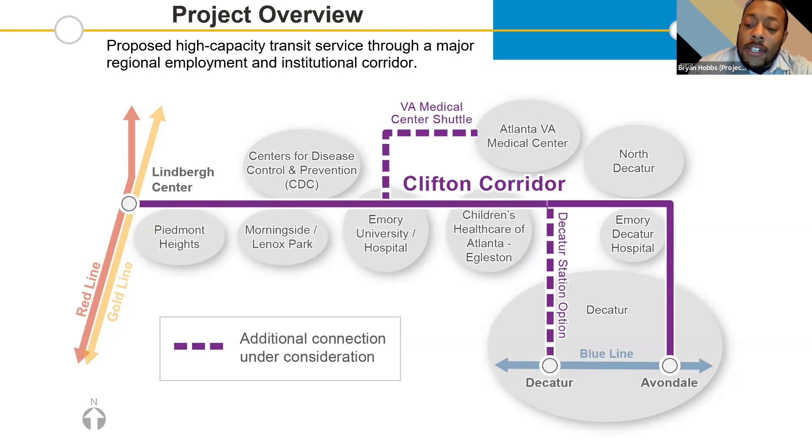If you may remember, we eliminated Decatur Station as a terminus station for this corridor, and now we go from Lindbergh to Avondale Station. What you see new on this map would be the dashed line, which is the additional connections under consideration. That would be our Decatur Station option, which is currently slated to be ART, and then a VA Medical Center shuttle, which at this point we are also considering. So again, that's just an overview, you've seen this before, and we'll go to the next slide.

So this current phase of work, again, we're still in alternative analysis, but we're getting to that point where we're really ready to recommend an alternative to the MARTA board. Our goal with this process is to select that recommended alternative for adoption by the board and then proceed into the environmental review process with the FTA.

Before we get into the analysis, I want to give everybody a refresher about the modes we've considered for this project. The first mode is ART, or arterial rapid transit. We also considered BRT, or bus rapid transit, and LRT, or light rail transit.

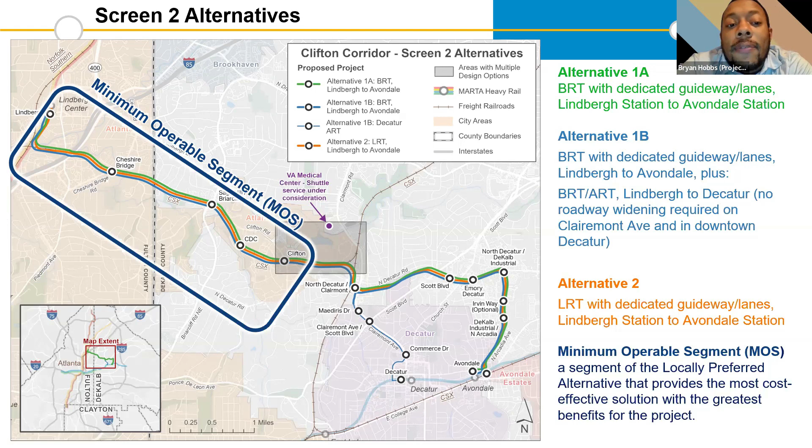I want to talk a little bit about the characteristics of each of the alternatives. So this is alternative 1A, as you can see. Again, this is BRT from end to end, from Lindbergh to Avondale Station.

Looking at the time frame, it's 31 minutes to travel from Lindbergh to Avondale Station, whereas typically in peak hours, Google says it takes 1 hour and 15 minutes by car to make that same trek. So all the way from Lindbergh to Avondale, 31 minutes with the BRT versus about 1 hour 15 minutes driving at peak time. That's a very big difference in time savings.

It's 97% dedicated right of way for the BRT in alternative 1A. When you look at the number of people within a half-mile radius of the stations, using 2020 numbers, you touch about 39,000 to 40,000 individuals. Same thing with jobs - using 2018 numbers, since that's before the pandemic - there are 34,400 jobs within a half-mile radius of the stations. So as you can see, it's a very busy, populated area around the stations.

Similarly, BRT with dedicated guideway from Lindbergh to Avondale is the same as alternative 1. The only difference here is that we are now considering an additional connection going down to Decatur. Right now it's ART, but it could be something different. From a time frame standpoint, it's still 31 minutes of travel time from Lindbergh to Avondale, but what you see differently is a 27-minute travel time from Lindbergh to Decatur station, even in mixed traffic. That shorter time is mainly due to the fact that it's a shorter route, since the BRT route is a little longer, so you're anticipated to get to Decatur station a little faster than Avondale station.

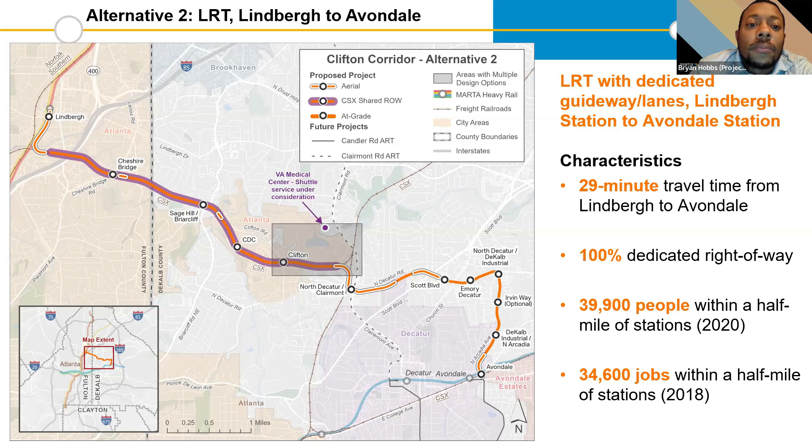So one thing I do want to touch upon before we move on into comparing the modes and comparing the alignment: the Federal Transit Administration's New Starts or CIG program, the Capital Investment Grant Program, which includes new starts and small starts.

In comparing these two alternatives and deciding which one should move forward, they're pretty similar, as I talked about before, in a lot of characteristics. But what really stood out was mobility improvements as well as cost effectiveness. Those two things really separate the alternatives, as you'll see in a few minutes. That helped us understand which of these alternatives needed to move forward based on which projects had the greatest potential to receive federal funding.

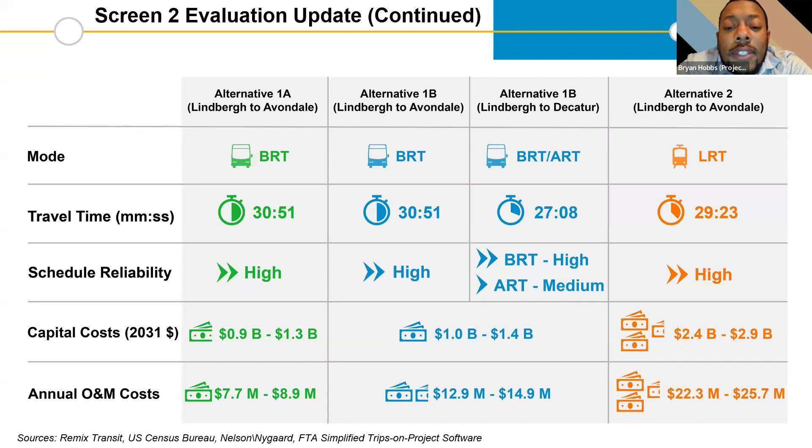The same can be said for annual O&M costs. For Alternative 1A, we're looking at about $7.7 to $8.9 million in annual operating costs, $12.9 to $14.9 million for Alternative 1B, and $22.3 million to $25.7 million for Alternative 2. So again, when you look at the difference between these alignments and modes, it really stands out when you talk about cost.

Travel time, reliability—similar. So what's really different about these modes right now is the cost. LRT is 2.5 times higher than our alternative 1A or alternative 1B at this point.

So that brings us to the similarities and what's different. When you think about BRT and LRT similarities, the share of dedicated right-of-way is similar. We talked about 97% for BRT in the end, and 100% dedicated end-to-end for LRT. So not much difference there.

Travel times and schedule reliability, very similar. We saw 29 for LRT, 30 for BRT—about a 1 minute difference. So not much difference when you talk about times, travel reliability, and scheduling.

Projected ridership: what we're seeing initially are some comparable numbers. We are not releasing ridership yet because we're still working on the model with the FTA—it's a new model, and with anything new there are growing pains. We're working with the FTA to ensure the inputs and outputs are correct before we're comfortable putting in these numbers. So right now we're not ready to release ridership numbers, but when we come back, we'll be talking ridership again.

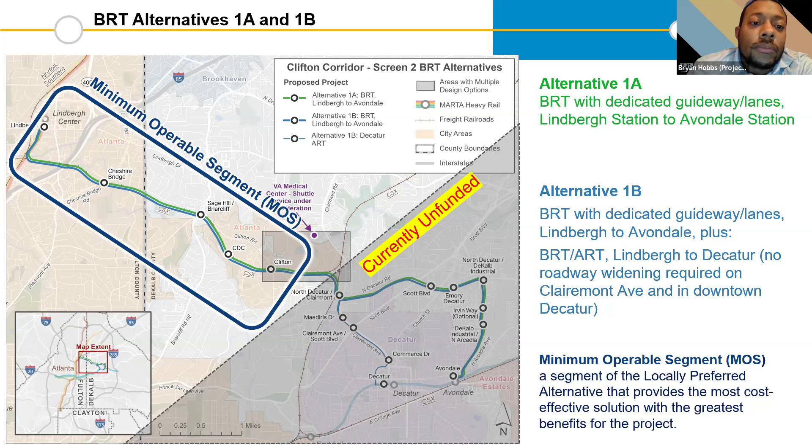So what does that leave for next steps for us? One thing we will do is hold a virtual-only meeting here in the next couple of months to present to you which of the alternatives we will move forward with. As you saw earlier, the difference is really the ART, or additional service going down to Decatur, if that continues to be viable. Once we come back to you all after that virtual meeting, we will give you 30 days to comment on that alignment. So please make sure you're on the lookout for that. We're looking, at some point, right now slated for May 2023, to go to the MARTA board for adoption. So that is what we're looking at at this point.

Just so you know, we do have one more meeting. This is more of an open house style meeting that will be at the North Decatur Presbyterian Church on Medlock Road in Decatur. You can come there and ask questions. It won't be a formal presentation, but you can ask questions you may have, or for those who have not been to the in-person formal meeting or this meeting tonight, they can come and ask questions. So please tell them we will be out again Saturday from 10 a.m. to 2 p.m. to answer any questions. And with that, I'll turn it back over to Content.

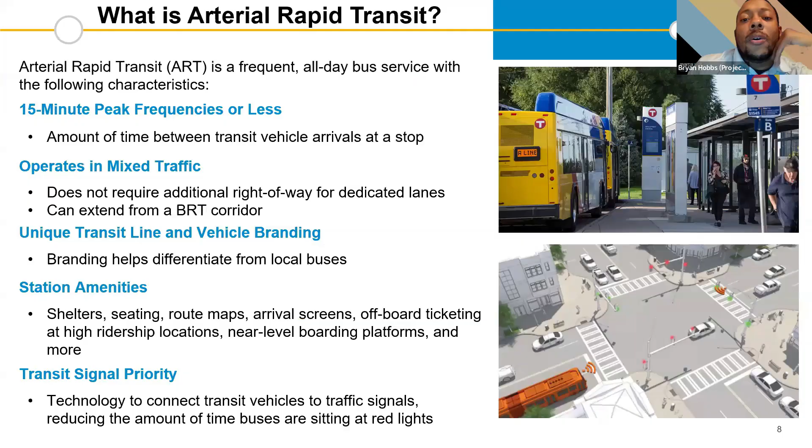Yeah, sure. We'll go back. We have a slide where we talked about what each mode actually entails. If you look here on this slide, ART and rapid transit, essentially the different characteristics, the guideway types—the difference really right now from a guideway type is you have dedicated right of way for light rail and bus rapid transit, so that's your BRT, LRT. ART is mixed traffic, typically in your current travel lanes. As you can see, some typical peak frequencies between the two: 10 minutes or better for bus rapid transit or light rail, because we wanted that to mimic rail. So light rail and bus rapid transit are similar. From the standpoint of ART, it's 15 minutes. That is still better than local bus service, so it is a much faster service. And as well as the capacity, when you start talking capacity, light rail as well as bus rapid transit holds more people—we can move more people per hour—where you're moving fewer people with the arterial rapid transit, but again, more than your local bus service, as well as the difference in the time frames.

Great, thank you for that answer. Okay, we have a question regarding the VA shuttle option. The question is, are there initial designs for where or how the VA shuttle will connect to the BRT?

Yeah, so we've had some initial conversations. We're working with, obviously, we have to work with Emory on that because it does go through the heart of their campus. So we've had conversations with Emory. There are a few options, it's not finalized at all. So we do have some ideas working together with Emory about how that looks, and then we'll start talking to the VA as well about how that connection looks to them. So right now there are a few options, we just will not narrow those things down until the next phase here.

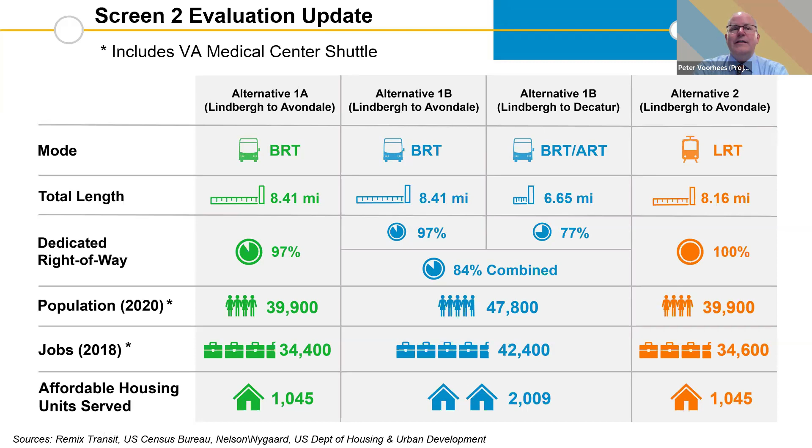In the eastern part of the corridor, where you would leave the railroad right-of-way and enter street right-of-way, conversations need to be ongoing for how to create those dedicated lanes. The expectation is probably that the path forward is to maintain existing travel lanes and still find a way to provide dedicated transit lanes. There are places where it seems there would not be a significant impact on traffic to convert a travel lane to a dedicated transit lane, but there are other places where that would be a real challenge. So ongoing conversations for how to make that happen.

I guess the other thing I would add is, alternative 1B that we're showing here right now, where a BRT vehicle would potentially travel in the CSX corridor and then transition at North Decatur Clairmont to Clairmont Avenue to approach Decatur in shared lanes.

The path there in shared lanes is very similar to bus operations today. So, not an anticipated impact on traffic there, but ongoing conversations for how to provide those dedicated lanes in the eastern part of the BRT segment.

Thanks, Peter. Since we have you, can you explain how the buses will maneuver through traffic and their dedicated lanes to pick up passengers? And Bryan, you could address this one just as well, I'm sure.

No, a BRT vehicle doesn't need to leave its dedicated lane to pick up passengers. There would be new stations located in the roadway, potentially in the center, an island station with good walk access. The BRT vehicle would just pull right up to that station, open all its doors, and let people on and off through every door. You pay before you board. You wouldn't have to leave that lane and navigate through shared traffic to get to a curbside stop. You would stay in that dedicated lane.

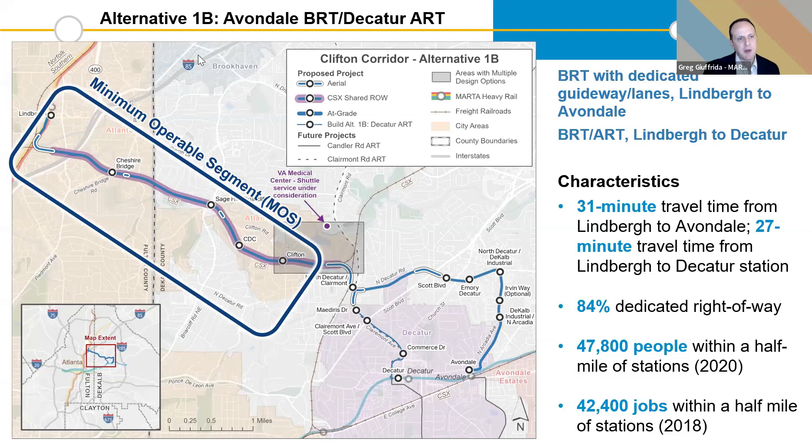Bryan, could you take us back to the slide comparing the modes, which I think had some of that information? Yeah, let's see here. So again, it's we would do the same thing we would with light rail, basically, when it comes to riders and how many we can fit per hour. As you can see here, it just depends on the operations, which we will get into in a much deeper dive in the next phase.

And there was a question if other forms of transportation, particularly pedestrians and wheeled vehicles like skaters and cyclists, could this future design incorporate them or their utilization as a part of this process?

Yeah, that's kind of what I mentioned earlier about continuing to evaluate areas where we can include design that allows for other modes of transportation—bikes, scooters, things of that nature—to be adjacent to or along the corridor. So we'll continue to look at that, but it just depends on the area we're in and the right of way we may have.

Hey Bryan, I wonder if I can step in for just a moment on this capacity question and ask if Chris Johnson can help out. I believe this capacity information we're showing is how many riders each transit mode can carry in each direction, so if you're considering service traveling in both directions, it's double these numbers.

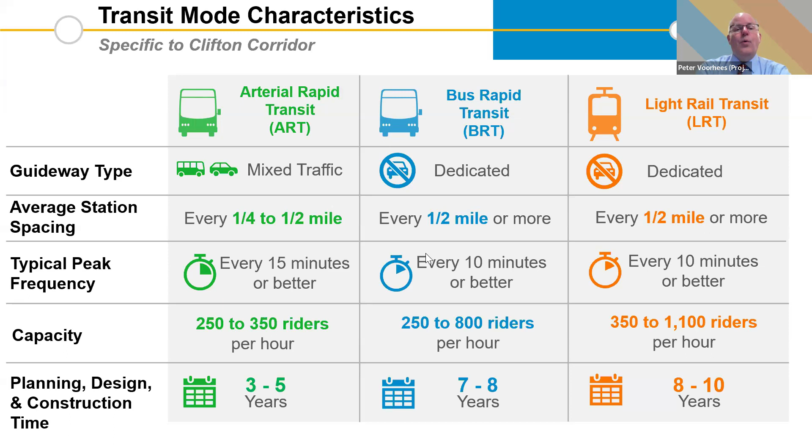Peter, you got anything on that as well? We also had a lot of discussion in the previous round about how there was not community support for widening the right-of-way along Clairmont Avenue through Decatur. So how could you provide a branch like that with LRT or BRT? The conclusion was you'd need more right-of-way for dedicated lanes in that heavily trafficked area, with mature trees and historic homes along the corridor, and there was no support for widening the right-of-way. How else can you do it?

Well, maybe you could build a subway. But there's not the anticipated level of demand to justify the cost of building a subway there. That's the most capital-intensive form of public transit, especially underground stations. So we're not seeing the cost effectiveness there.

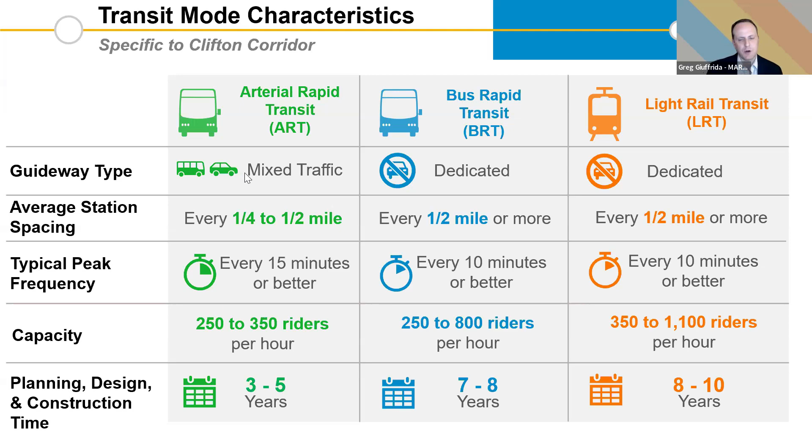Bryan, can we move the slide up to 1A or 1B? I want to make one final point and then wrap up for tonight, since we're at 8 o'clock. I think it's important to note all the additional destinations served by the Avondale terminus, as far as community institutions, healthcare facilities, housing, and so on. Then we'll wrap it up.

You want to go ahead, Peter? Well, that Avondale branch serves the Emory Decatur Hospital, grocery stores, and mixed-use residential neighborhoods. There's a VA clinic along DeKalb Industrial, and the farmers market, plus new developments and services on the opposite side of the tracks at Avondale. Lots of services are served by that branch, and it provides really reliable and fast service even during peak hours, connecting to the Blue Line.